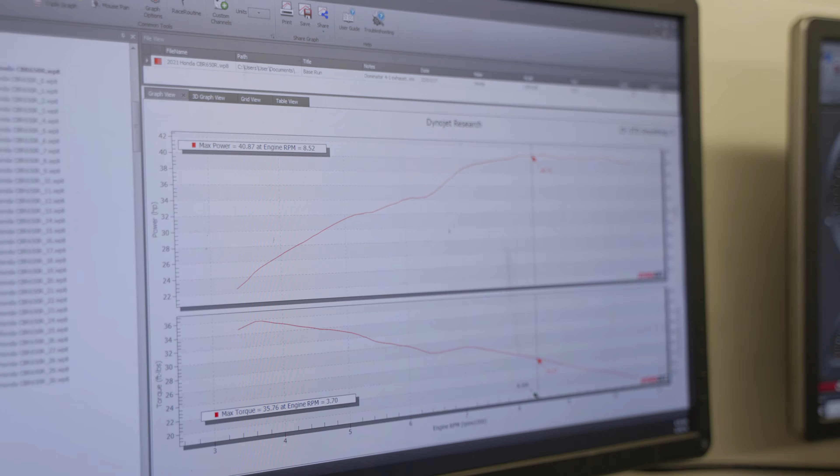Yeah, good, mate. So what we've done, hang on, I'll bring it over on this side of the screen so you can see it. Can you get that all right on your camera? Yeah. So that's your base run. When we're going to tune or de-restrict anything, we like to do a base run so that we know where our starting point is. So we've base run this at 41 horsepower. That's the CBR650 with the intake stacks restricted still.

Obviously they're a LAMS approved bike. A lot of guys buy them because they're a good little bike later on when they're de-restricted, because they'll double the horsepower. So we pull the standard intake stacks out and modify them. If you pull the airbox lid off on a restricted bike, you'd see the stack was about 80% blocked. Imagine an intake stack with a big hole through the middle. These have a flat plastic flap through the guts of it, so it blocks about 80% and restricts it, therefore makes that smaller horsepower mark.

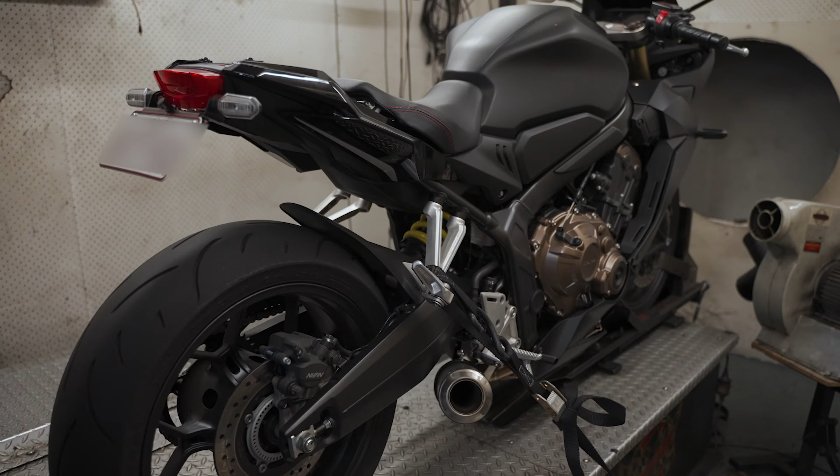Obviously when you take that out, the bike will run very lean. So if you just de-restricted one, you wouldn't want to run it without redoing the fuel system. We have to put a lot of extra fuel in there, because you double that power, you get a lot more air. It changes the basic air curve on that engine, so you've got to alter the fuel curve to suit that new air curve.

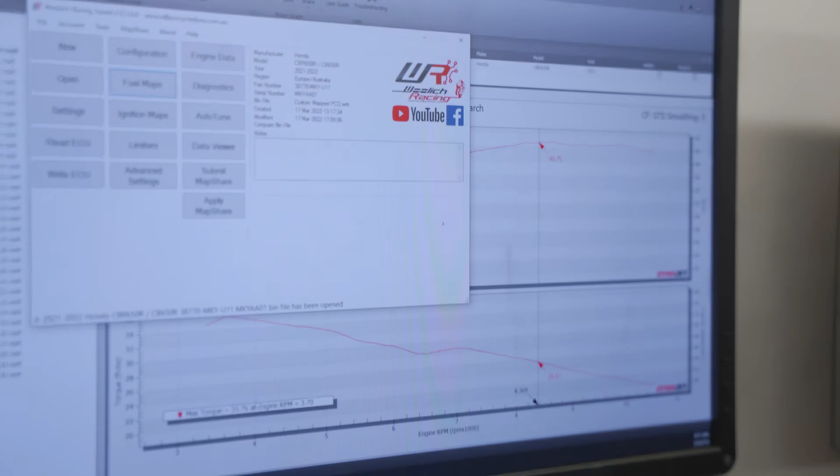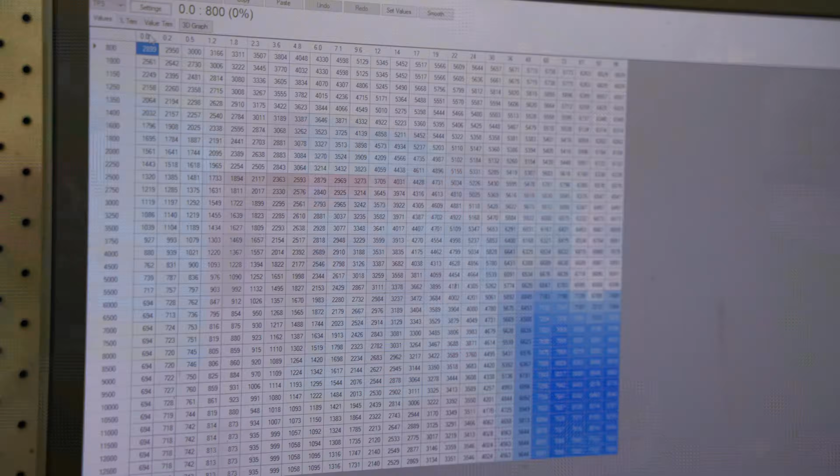So we've mapped this and set all this up for you. We use the Woolich Flash Tune software, which enables us to go through the standard ECU settings. We can rewrite all the fueling and do a lot of stuff to de-restrict. So if we look at the base fuel map, we go into the throttle position tables, to percentage of trim of how much fuel we have to add, you can see all these numbers here.

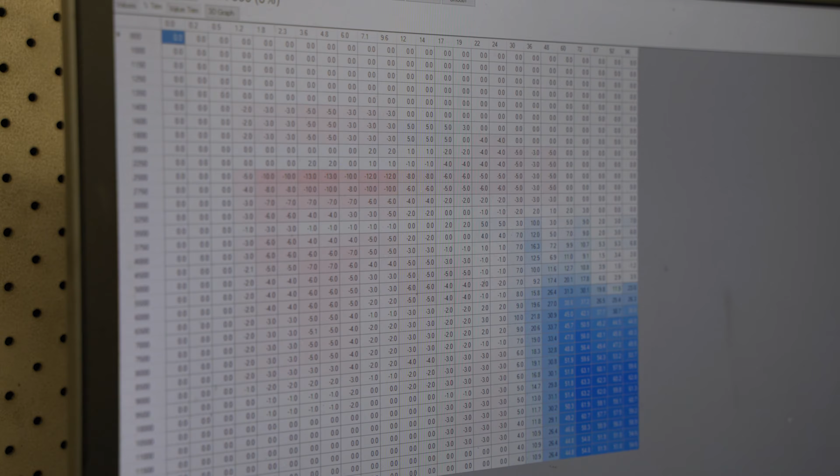You've got throttle position across the top, so up in the higher area we've had to add 55-60% more fuel where that bike will now accelerate to, because it has so much more air from changing those intake stacks. So now the fueling is safe. You wouldn't do that without this fueling, or it will expire the engine. Without that fuel, the engine will run very, very lean, causing engine damage and so on. Things we don't like. Yeah, definitely.

So we've wrote that fueling for you. If you like, I can do you a power run, show you how it now accelerates, so then you can take it out and have some fun. Let's do it. Good man.

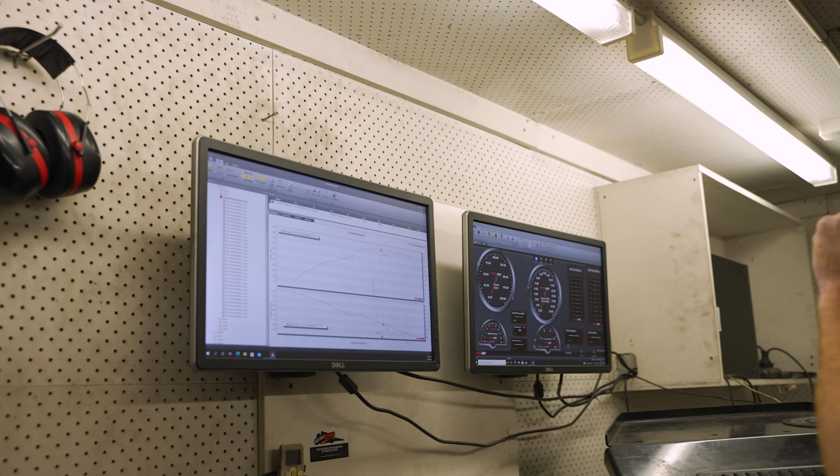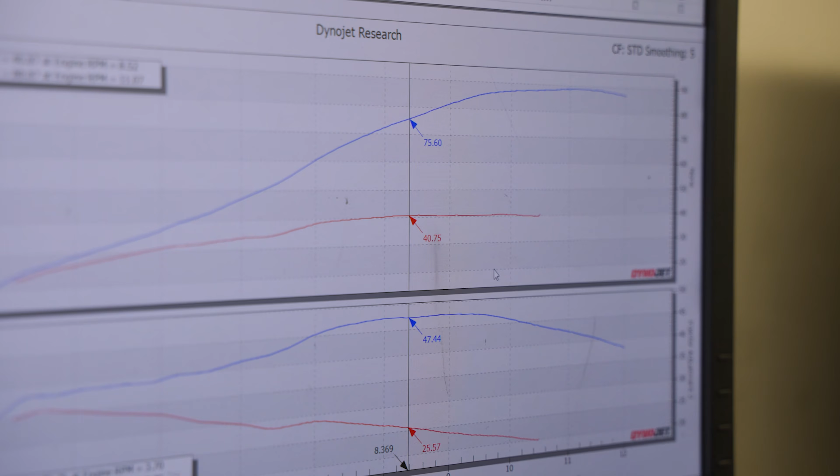Righto. Awesome. So, how was that? That was awesome, mate. As you see, I've got the base run still on the screen there, that was 40.8. Now this is our new power. You can see the red line, I've got an overlay there for you. The baseline was 40.8; with those intake stacks modified and the new fuel map we've wrote, your power now is 88.87. So you've more than doubled your power.

That's incredible. It also increases the fun factor. Yeah. Straight away there on an over rev, and I'll print all this out for you so you get a copy. But yeah, a lot better. Just because it's making that power now, you're not gonna jump on that bike de-restricted and all of a sudden it's gonna be crazy fast. It will only go as fast as you pull the throttle on.

A lot of guys go, oh no, I don't want that extra power. Well, it's going to be a lot more fun to ride, and people complain about these where they nose over badly. Obviously if you're a LAMS rider or a novice rider, you're not going to do this till you have some road experience. It's a great bike to buy on a LAMS license because it is nice and restricted, so you can get used to the road.

When you get off that LAMS license, perfect motorbike, because all of a sudden 88, 90 horsepower is a great bike. You have fun in the twisties. It's enough power to ride and just have a ball on. Yeah. Awesome. Good job, mate.

Thanks, Fred. Appreciate it, mate. No problem at all. Alright, guys. Oop.

Alright, guys. There you have it. The Honda CBR650R tuned. Ready to take it on the streets and have some fun. Safety, of course. Looking forward to taking it out now. So double the horsepower, from 40 to 89. Pretty much double the power. De-restricted, Woolich tuning with a K&N air filter.